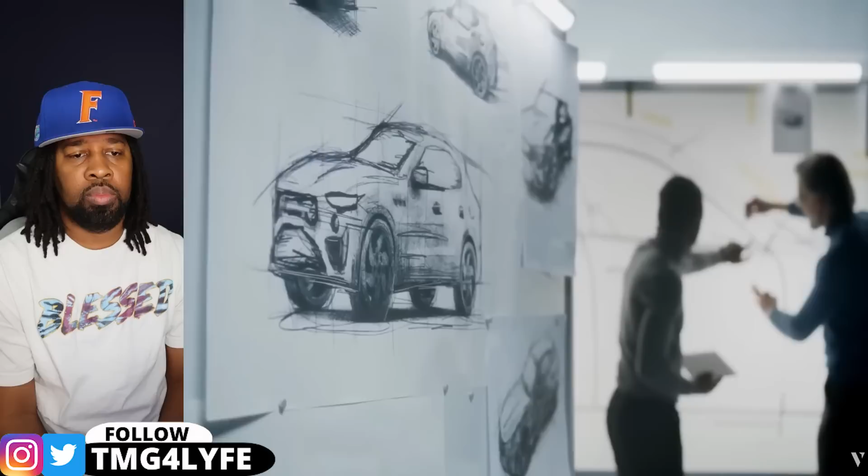Elon Musk's vision has always pushed the boundaries of what we consider possible. From electric cars to reusable rockets, his name is synonymous with innovation. But what if I told you that his next big idea could change the automotive industry in ways we never imagined?

Okay, I get it. This is where y'all get mad at, right here. When they make comments and statements like that, 'his next big idea.' This is, okay, I get it now. This is where y'all get mad, and I can respect that.

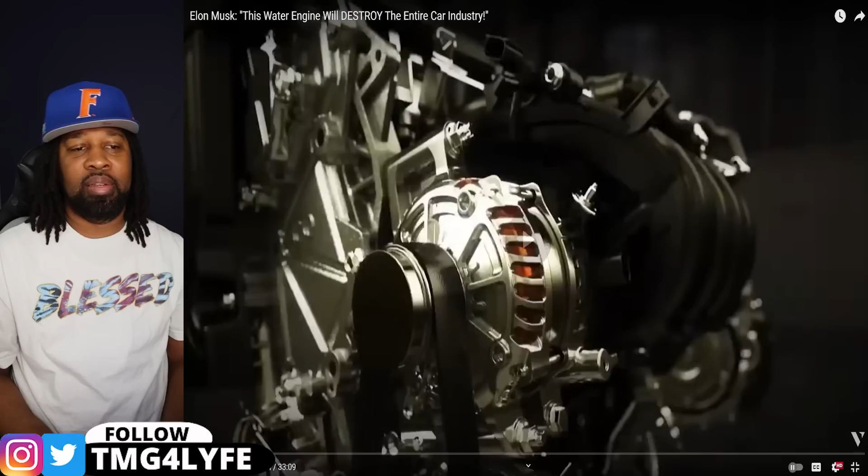Today, we're diving into the world of water-powered engines and discussing the rumors and facts surrounding Musk's reported interest in this technology. For years, the concept of water as a fuel has captivated scientists, engineers, and dreamers alike. The idea that something as abundant as water could power our vehicles, potentially eliminating the need for gasoline and reducing our carbon footprint, sounds like something straight out of a science fiction novel. And yet, as we'll explore, it might be closer to reality than you think.

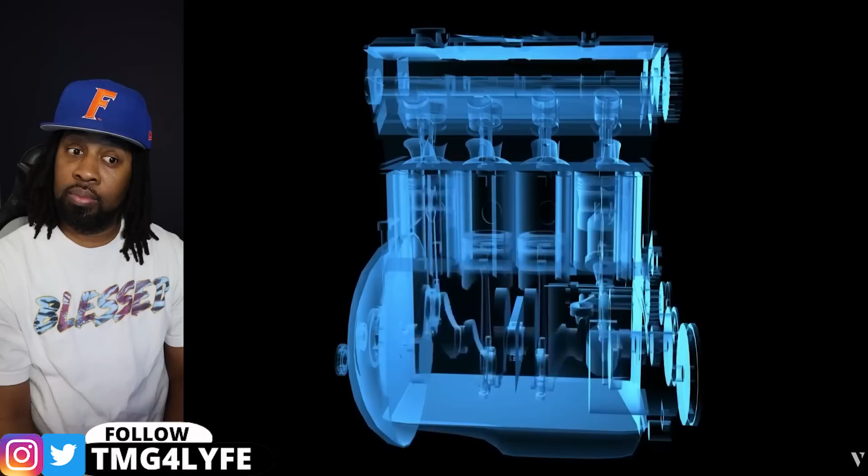Water-powered engines, or hydrogen fuel cells, represent one of the most fascinating alternatives to traditional fossil fuels. Unlike electric vehicles that run on lithium-ion batteries, hydrogen fuel cells generate electricity through a chemical reaction between hydrogen and oxygen. The byproduct of this reaction? Pure water. No greenhouse gases, no toxic emissions, just water vapor.

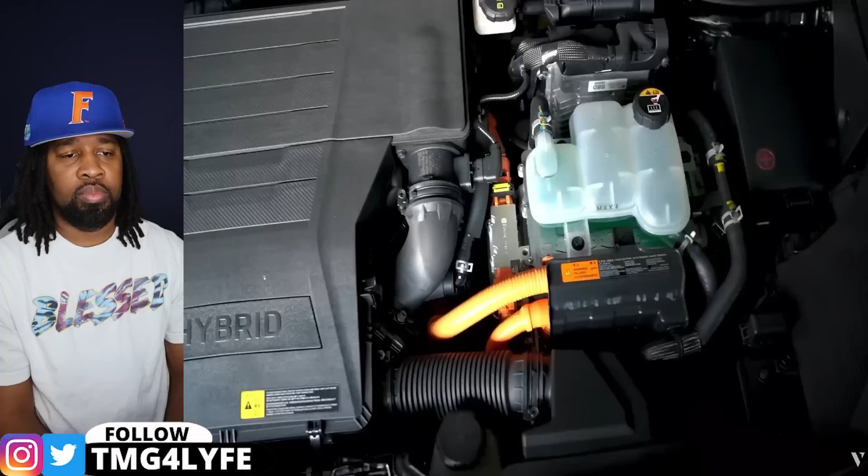While the idea of using water to power vehicles sounds revolutionary, the technology behind it is complex. Hydrogen fuel cells split water molecules into hydrogen and oxygen through a process called electrolysis. Once separated, the hydrogen is stored in fuel cells, where it can react with oxygen to produce energy. This process generates electricity that powers the motor, much like a battery in an electric car.

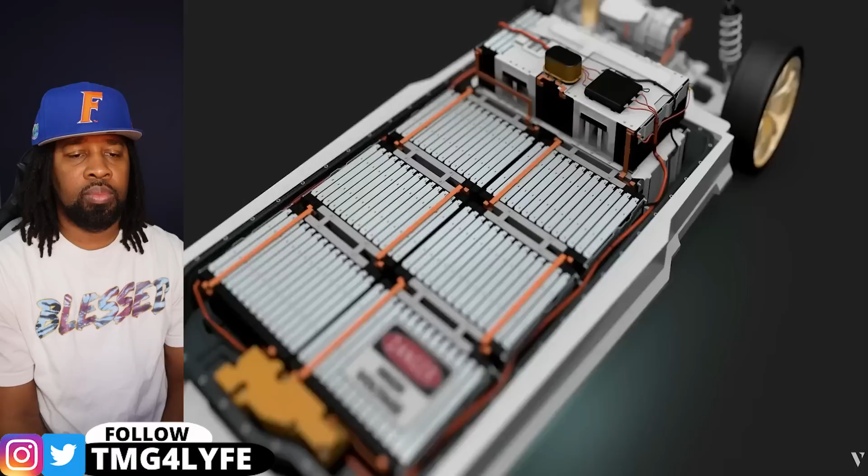For years, hydrogen fuel cells were overshadowed by battery technology due to the latter's growing popularity and advancements in battery life and efficiency. Companies like Tesla, spearheaded by Musk, have invested heavily in electric vehicles, or EVs, effectively positioning batteries as the future of the automotive industry. However, with recent advancements in fuel cell technology and the increasing need for sustainable solutions, hydrogen is gaining traction as a viable alternative.

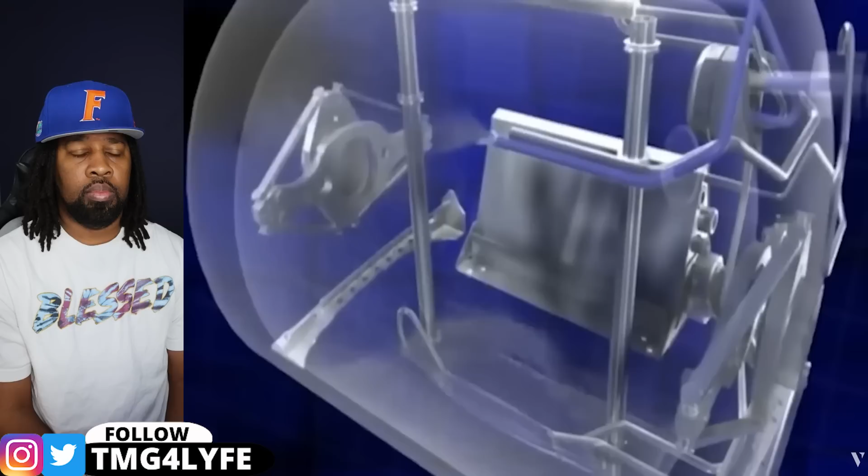While Tesla has yet to make an official announcement, rumors are circulating that Musk's team is working on a prototype that could revolutionize the industry. If successful, a water-powered engine could eliminate the need for traditional fossil fuels, reducing emissions and making transportation more sustainable.

The automotive industry as we know it relies heavily on gasoline and diesel, both of which have significant environmental impacts. The production and burning of these fuels release vast amounts of carbon dioxide, contributing to global warming. Electric vehicles offer a cleaner alternative, but they still rely on electricity, often generated from fossil fuels, and their batteries require rare materials that are challenging to mine and dispose of responsibly.

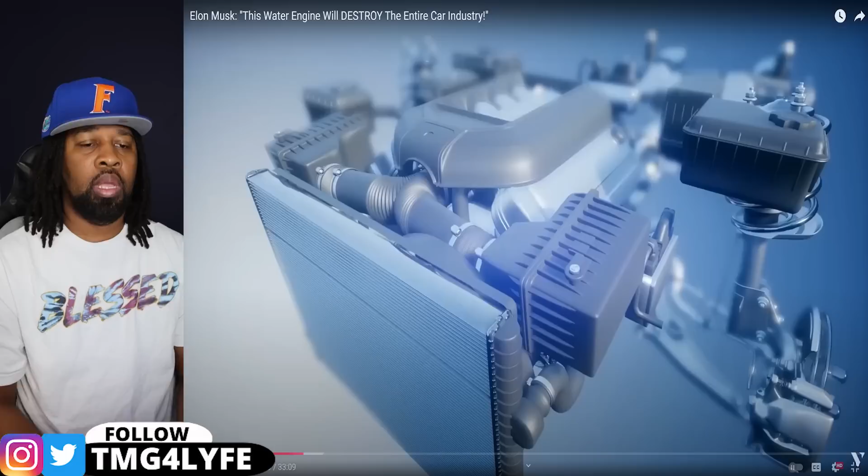Now, here's something that made me kind of hesitant on these electric vehicles, right? It was just recently Black Friday, or Thanksgiving, and I was down in the Savannah area, and there's a Tanger outlet there. So we went there, me and the wife, just trying to kill some time.

When we got there, there was a couple parked next to us charging their Tesla, standing outside charging it. We went in, shopped at the Tanger outlet, got food, all different things, came back — they were still standing there. Not just having a conversation, they were still there charging their vehicle. That's like a horror scene for me. I don't want to be standing in one place that long. So that just gives me a lot of eerie feelings about having an electric vehicle, bro.

I like the idea, just like gas — put it in there, fill it up, done. Plug it in, few minutes, done. I want to be gone.

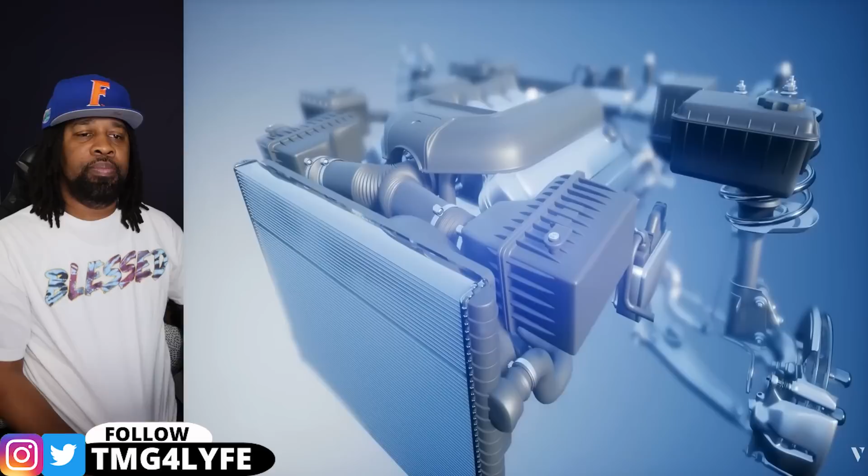A water-powered engine could change this equation entirely. Hydrogen fuel cells produce only water vapor as a byproduct, making them one of the cleanest energy sources available. If Musk were to champion this technology, it could pressure other automakers to follow suit, potentially disrupting the entire car industry. Imagine a future where our vehicles run on water instead of gasoline, reducing pollution and paving the way for a cleaner, greener planet.

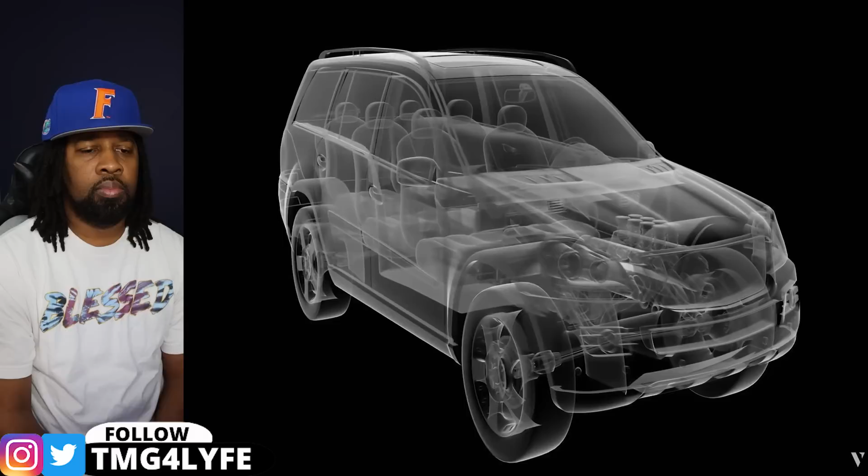However, transitioning to hydrogen-powered vehicles is not without its challenges. One major obstacle is the infrastructure needed to produce, store, and distribute hydrogen on a large scale. Unlike gasoline or even electricity, hydrogen requires specialized equipment and facilities. Building a hydrogen refueling network would be costly and time-consuming, but with the right investments, it could become a reality.

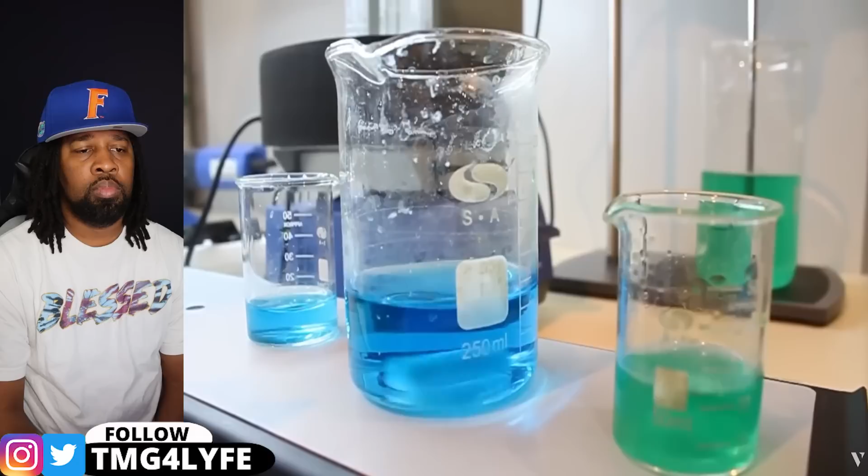Another challenge is the cost of hydrogen production. Electrolysis, the process of splitting water to obtain hydrogen, requires a significant amount of energy. If this energy comes from fossil fuels, the environmental benefits of hydrogen are diminished. To make hydrogen truly sustainable, we would need to use renewable energy sources like solar or wind to power the electrolysis process.

This would make hydrogen production both clean and sustainable, aligning with Musk's vision of a renewable future. If Elon Musk does indeed pursue hydrogen technology, it could accelerate the development of a hydrogen economy. With Musk's influence and resources, Tesla could lead the way in building hydrogen infrastructure, making it more accessible and affordable. This would not only benefit Tesla, but also pave the way for other automakers to adopt hydrogen technology, creating a ripple effect throughout the industry.

In addition to hydrogen's potential in transportation, it could also play a significant role in energy storage. Renewable energy sources like solar and wind are intermittent, meaning they don't produce power consistently. Hydrogen can act as a storage medium, allowing excess energy generated during peak times to be stored and used later. This could make renewable energy more reliable and scalable, further advancing Musk's vision of a sustainable energy ecosystem.

The concept of a water-powered engine is not new. Inventors and engineers have been experimenting with hydrogen fuel cells for decades, but the technology has faced numerous hurdles. Safety concerns, high costs, and lack of infrastructure have all hindered its development. However, with Musk's track record of overcoming obstacles and pushing the limits of what's possible, he could be the catalyst needed to bring this technology to the mainstream.

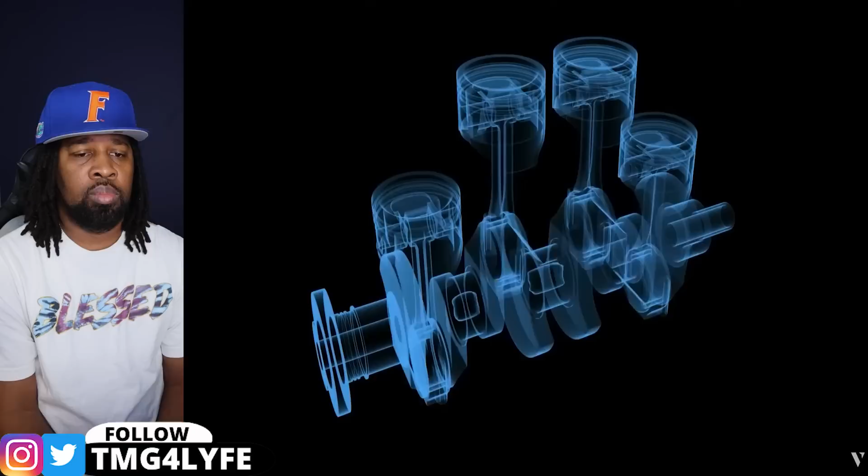Elon Musk's ambition to potentially introduce a water-powered engine or integrate hydrogen fuel cell technology into Tesla's lineup would be nothing short of revolutionary. Let's expand on this concept, detailing everything from the scientific principles behind hydrogen fuel cells to the potential global impact of adopting this technology at scale. We'll also explore the technical, economic, and societal shifts that could unfold if Tesla and Elon Musk move forward with this groundbreaking vision. The topic raises many exciting possibilities for the auto industry, energy sectors, and global infrastructure, not to mention potential environmental and political ramifications.

So let's look at how this technology could disrupt traditional energy dynamics, reshape urban planning, influence geopolitics, and, most importantly, redefine Tesla's role in the future of global transportation.

The mechanics of water-powered vehicles: how hydrogen fuel cells work. At the heart of this potential innovation is hydrogen fuel cell technology. To understand its transformative potential, let's first look at how it actually works. Hydrogen fuel cells generate electricity through a chemical reaction between hydrogen and oxygen. In simple terms, the cell splits the hydrogen molecule into protons and electrons. These electrons are used to generate a current, which powers the motor and other systems in the vehicle. The only byproduct of this process is water vapor, making it an incredibly clean energy source.

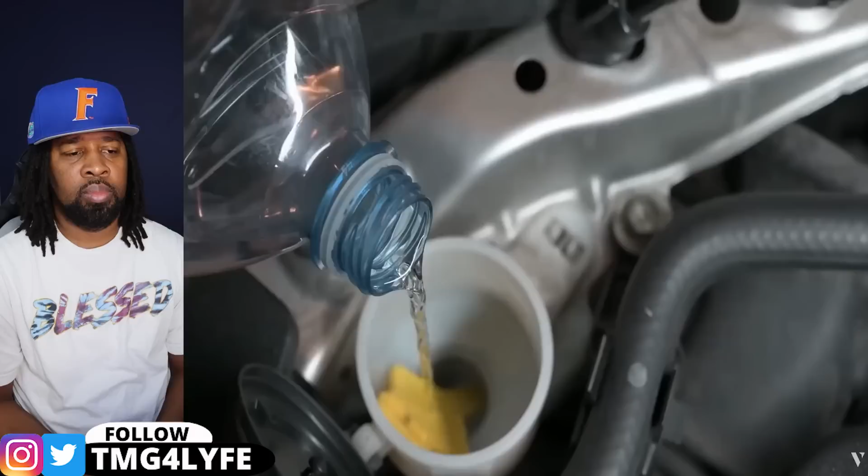When we think of water-powered engines, it's easy to get caught up in the idea of just adding water to a tank and driving off.

That's me, my mind is so simple. I'm like, will I be able to put a hose up to it? You know what I mean? Get one of those pitchers from under my cabinet, fill it up at the sink, take it outside, pour it inside there. Or am I gonna have to order a special type of water? Does it come in different brands? You know, the cheap brand or the high-end brand? Do I put the one that has a high pH? I was thinking of all that type of stuff, man.

However, a more accurate description is that these vehicles would run on hydrogen extracted from water. Electrolysis, the process of using electricity to split water into hydrogen and oxygen, is essential here. This hydrogen can then be stored and used in the fuel cells to generate electricity. While this process does require energy input, advances in renewable energy could make this part of a truly sustainable cycle.

Why Elon Musk may be reconsidering hydrogen fuel cells. Musk has historically dismissed hydrogen fuel cells, but his current stance on sustainable and scalable energy solutions may be evolving due to several factors.

Energy density and refueling time. Hydrogen fuel cells offer advantages over lithium-ion batteries in terms of energy density, which could make them ideal for longer-range applications. Refueling a hydrogen-powered car takes just a few minutes compared to the longer charging times associated with electric vehicles, EVs. For commercial transport fleets, buses, and even airplanes, this reduced downtime is invaluable.

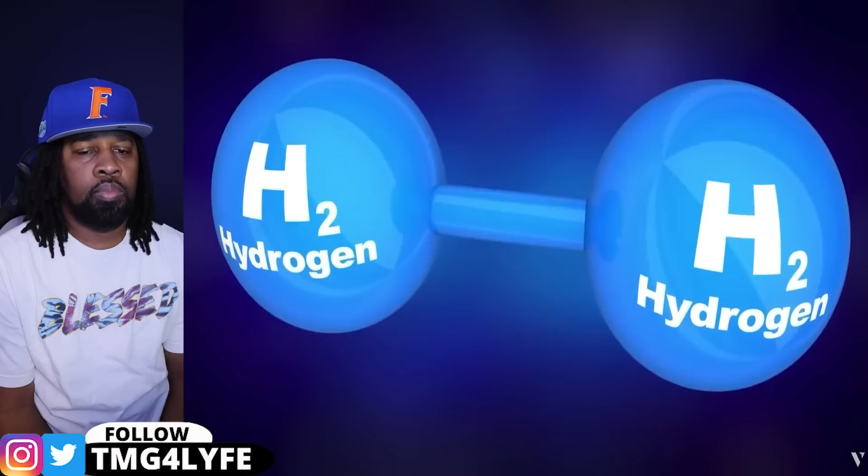Urbanization and infrastructure. With rapid urbanization and increased EV adoption, the pressure on power grids and charging infrastructure is intensifying.

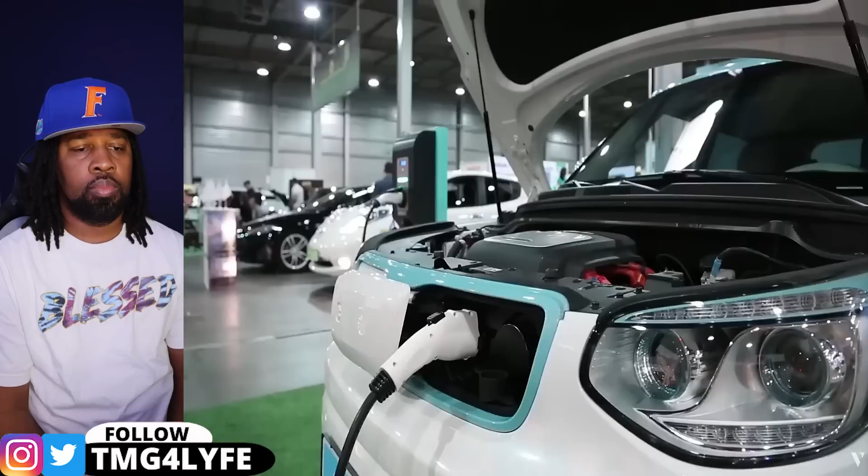Hydrogen could alleviate this strain by creating an alternative network that operates independently of the existing grid. Musk's understanding of infrastructure could be pivotal here—he could help develop a decentralized system that allows for broader adoption without placing undue pressure on any single part of the energy supply chain.

The economic implications of a hydrogen revolution led by Tesla: if Tesla were to fully embrace hydrogen-powered vehicles, the ramifications would be massive, impacting industries from oil and gas to urban infrastructure and beyond. A widespread adoption of hydrogen vehicles would further destabilize the oil market. Unlike lithium-ion powered EVs, which have reduced oil demand, hydrogen-powered vehicles could effectively remove it altogether. Nations and companies that rely on oil revenue would face unprecedented disruption, potentially accelerating their shifts toward renewable energy sources.

Power generation and grid strain. Hydrogen production requires electricity, which could drive demand for renewables like solar and wind. This aligns with Musk's mission at Tesla and SolarCity to create a vertically integrated renewable ecosystem.

That's why I've been looking at a few solar panel companies, man. There's gonna be money to be made in these areas—I mean, there's already money being made in these areas. I think I see more now when I drive around, a lot more solar panels on people's roofs than I've ever seen before. So start paying attention to those companies, man, and try to invest if you can.

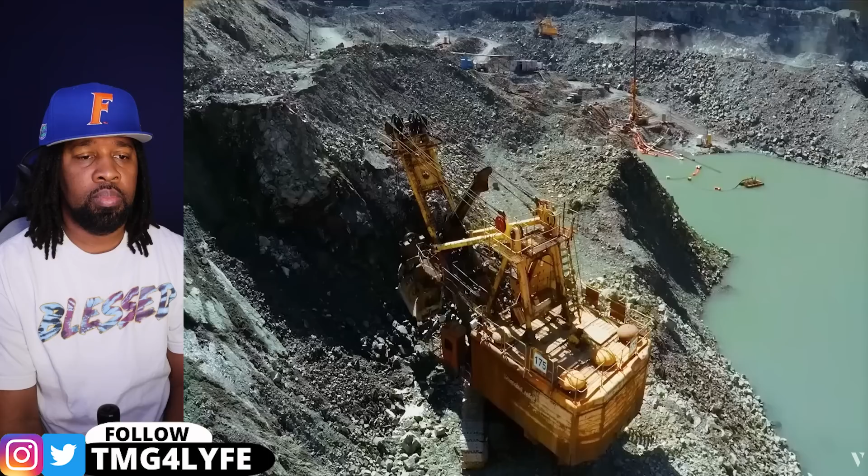Mitigating resource scarcity. The mining of lithium, cobalt, and other minerals required for batteries has significant environmental costs. Hydrogen fuel cells, by contrast, require fewer rare materials. While they do require platinum as a catalyst, advances in catalyst technology are reducing this dependency, making fuel cells more sustainable in the long term.

Technical challenges and solutions in hydrogen vehicle adoption. While hydrogen offers vast potential, several technical challenges must be addressed before Musk, or any automaker, could successfully bring a hydrogen-powered car to market. Here's a look at some of the key challenges and how Tesla might address them.

Storage and distribution. Hydrogen is notoriously difficult to store and transport. It requires high-pressure tanks, and building a network of hydrogen refueling stations is a major logistical and financial challenge. However, Tesla could leverage its experience in building supercharger networks and potentially partner with energy companies to create a hydrogen refueling infrastructure.

Throughout this whole video, I can just hear Elon Musk getting richer and richer, bro. Right? They could just partner with Tesla and they can create them. Man, bro, trillionaire will be here probably before the end of 2025—he'll be a trillionaire if he isn't already.

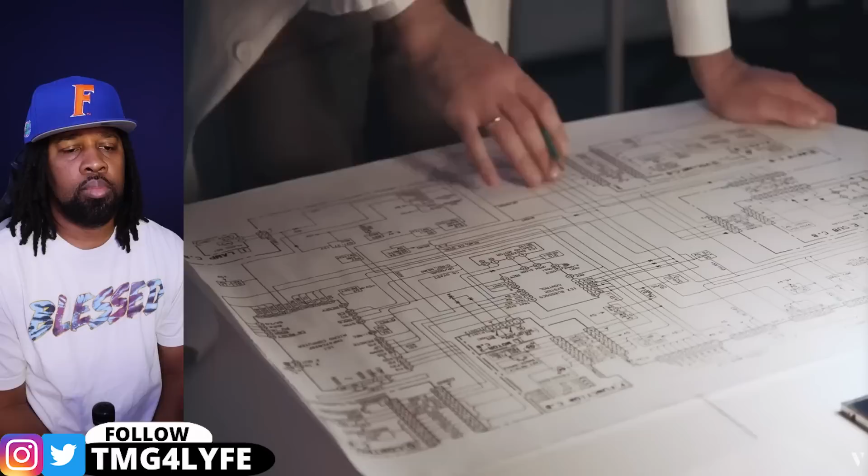Tesla's unique position to influence and innovate hydrogen infrastructure. Tesla is uniquely positioned to drive innovation in hydrogen fuel cell technology if it chose to do so. Through the supercharger network, Tesla already has experience developing infrastructure on a massive scale. Though hydrogen refueling is different, this experience is a significant asset.

Building a hydrogen refueling network would require extensive investment and collaboration with energy providers, governments, and environmental organizations.

Tesla's integration with SolarCity presents an intriguing opportunity. Imagine a setup where solar energy powers electrolysis at refueling stations, converting water to hydrogen on-site in a carbon-neutral process. Such a setup would make hydrogen production sustainable and further decentralize energy. Tesla could use its experience in renewable energy and energy storage to make this model viable. Of course, such a vision requires the support of regulatory frameworks, government subsidies, and industry-wide collaboration.

Tesla could also partner with countries looking to transition to green hydrogen economies. For instance, Germany and Japan are investing heavily in hydrogen, viewing it as an essential element of their future energy strategy. By partnering with these countries, Tesla could help build out hydrogen infrastructure globally, bringing hydrogen refueling stations to major cities and highways. If executed well, this could even surpass the company's supercharger network in impact and scale.

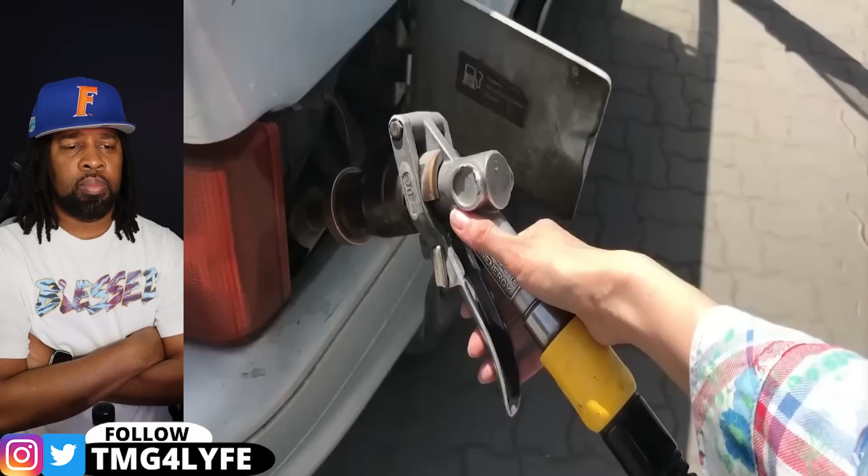The potential long-term savings on fuel costs make hydrogen a compelling option. In areas with abundant renewable energy, hydrogen could be produced for minimal costs during off-peak hours. This could lead to variable pricing models where hydrogen is cheaper at certain times, incentivizing off-peak refueling.

Tesla could also offer a subscription model similar to their full self-driving package. Customers might pay a monthly fee for unlimited hydrogen refueling, which would allow Tesla to manage costs effectively while providing predictable, clean energy access for its users.

Cha-ching, cha-ching, cha-ching. Are you hearing the dollar signs run up? You hearing the money run up for Elon?

Environmental impact: comparing life cycle emissions of hydrogen and battery electric vehicles. When we consider emissions, both direct and indirect, hydrogen fuel cells and battery electric vehicles each have strengths and weaknesses.

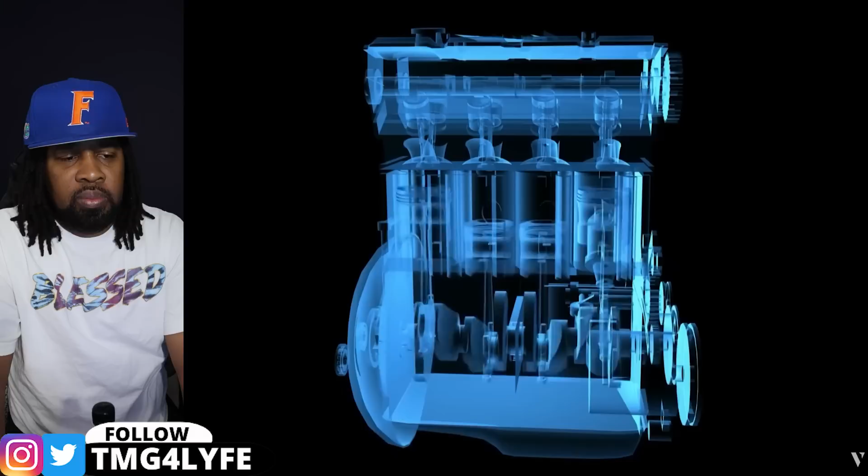Hydrogen fuel cells emit only water vapor, which is beneficial for urban air quality. However, the production of hydrogen, especially if derived from natural gas, can be carbon intensive. The current industrial methods for hydrogen production, mainly steam methane reforming, emit significant CO2. However, with renewable-powered electrolysis, we can produce green hydrogen, which has near zero emissions.

If Tesla were to invest in a green hydrogen supply chain, the life cycle emissions of hydrogen vehicles could drop below those of electric vehicles, especially in regions where the grid relies on fossil fuels.

Another consideration is resource extraction. Electric vehicles depend on minerals like lithium and cobalt, which have environmental and ethical concerns tied to their mining and extraction. Hydrogen fuel cells require rare metals like platinum, but at much lower quantities. Over the long term, green hydrogen could offer a cleaner, more sustainable alternative to battery EVs.

Urban planning and infrastructure: how a hydrogen economy could transform cities. If hydrogen fuel cell vehicles become mainstream, they would likely require the redesign of urban infrastructure to accommodate hydrogen production, storage, and refueling. Unlike electric vehicle chargers, hydrogen refueling stations demand more space, safety protocols, and technical complexity.

Cities could designate hydrogen fueling hubs, similar to existing gas stations, or even incorporate hydrogen production into public spaces. For example, excess renewable energy generated by city buildings could be stored as hydrogen in nearby refueling stations. This could enhance urban energy resilience by enabling cities to store renewable energy during peak production times and use it later, easing the strain on city power grids.

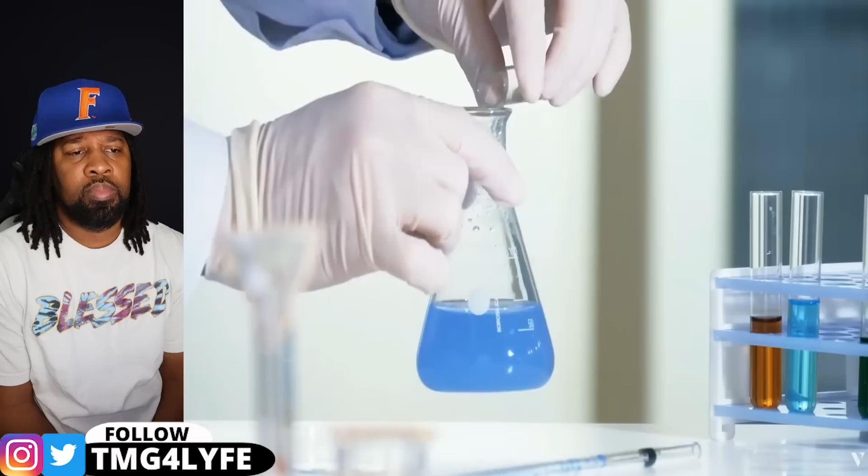Storage remains one of the most significant obstacles to widespread hydrogen adoption. Hydrogen has a low energy density by volume, requiring high pressures or cryogenic temperatures for storage. Researchers are exploring new materials for hydrogen storage, including metal hydrides and carbon nanomaterials, which could make hydrogen storage safer and more efficient.

Eight: Tesla's potential role in global hydrogen policy and advocacy. Tesla, under Musk's leadership, could become a prominent advocate for hydrogen policy. As Tesla did with electric vehicles, it could set new standards and push for policies that support hydrogen fuel cell adoption. Musk's reputation as an industry disruptor could bring attention to hydrogen and encourage other automakers and industries to follow suit.

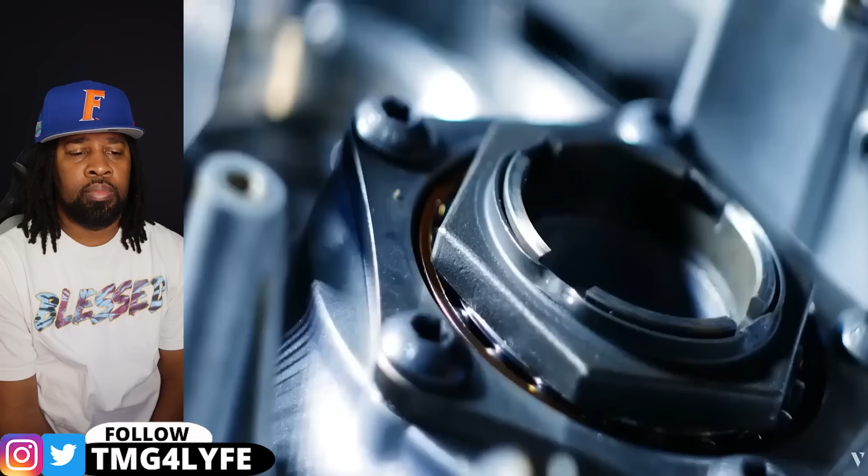Tesla's influence could extend to international policy, with the company potentially advising governments on hydrogen infrastructure and standards. Through partnerships with organizations like the International Renewable Energy Agency, IRENA, and other clean energy advocates, Tesla could play a role in shaping a global hydrogen strategy. This would not only benefit Tesla but also accelerate the world's transition to sustainable energy.

Nine: long-term societal impact. Could hydrogen cars shape the next generation of transportation? A widespread shift to hydrogen could have far-reaching effects on society, influencing everything from the job market to lifestyle choices and urban development. Hydrogen cars offer greater range and faster refueling than current electric vehicles, which could change how people approach travel, both for personal and commercial purposes.

In the long term, hydrogen-powered drones, airplanes, and ships could become viable, transforming logistics, shipping, and even global trade. If hydrogen infrastructure expands into rural areas and remote locations, it could support off-grid communities and reduce energy poverty, making sustainable energy accessible to more people worldwide.

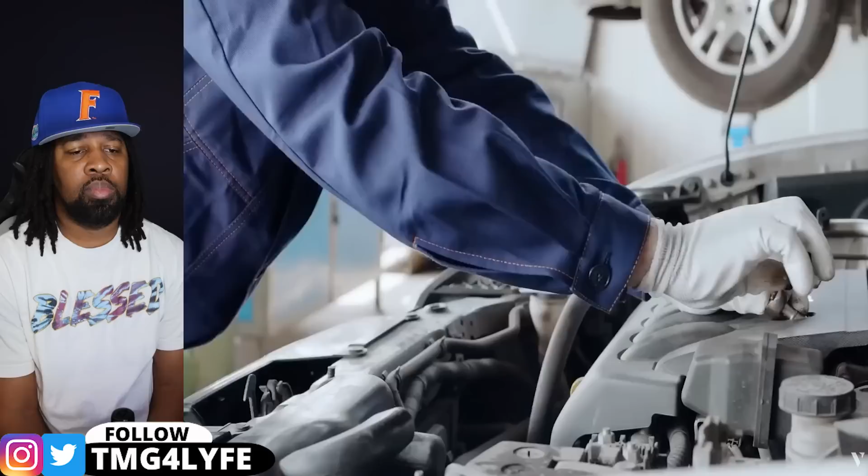In conclusion, while we don't have all the details about Musk's plans for a water-powered engine, the potential implications are staggering. If Musk and Tesla can successfully develop and commercialize this technology, it could revolutionize the car industry, disrupt traditional energy markets, and accelerate the transition to a sustainable future.

The idea of a water-powered engine may sound like science fiction, but with Musk at the helm, it just might become science fact. Whether or not Musk pursues hydrogen fuel cells, his commitment to innovation and sustainability will continue to shape the future of transportation and energy for generations to come.